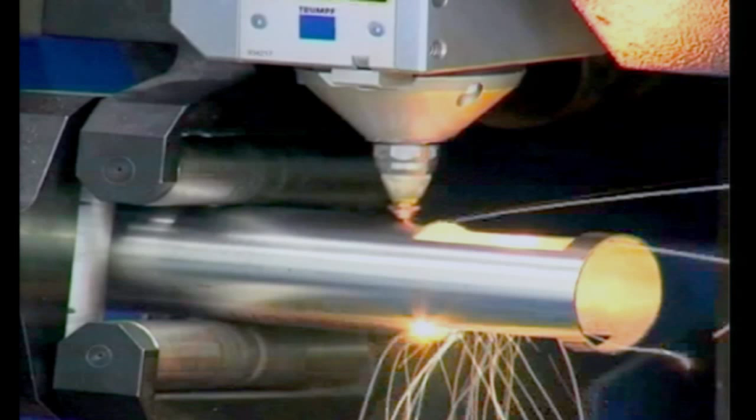Be that facades or built-in systems, in different materialities, that we can produce ourselves directly by working closely with fabricators in their workshops. A lot of our work—we did a lot of factories, we built lots and lots of factories early in the practice, and as we were working for these industrial clients, particularly in southern Germany and Switzerland, we started learning about their capabilities.

One client, Trumpf, produces laser technologies. This is an example of a machine called a Tubematic, which uses laser for cutting tube stock out of metal. So the idea of working—when we were students at Harvard, you'd typically start using software to produce shapes, and then somewhere down the road you would find materials to make a kind of architecture out of it, and tools.

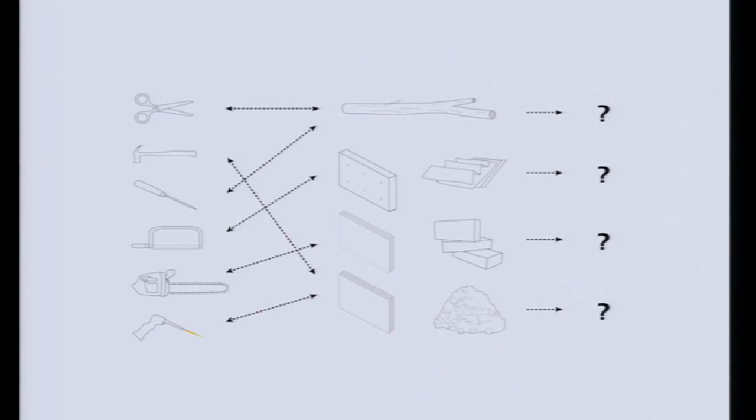We started doing projects where we would start with a material or groups of materials synthetically, find tools, often driven by software, that would produce forms in a certain way. So this kind of matrix of finding tools and materials and seeing how those things could be transformed—this kind of action verb, if you do something to something in a certain way, it would produce a certain kind of formal effect.

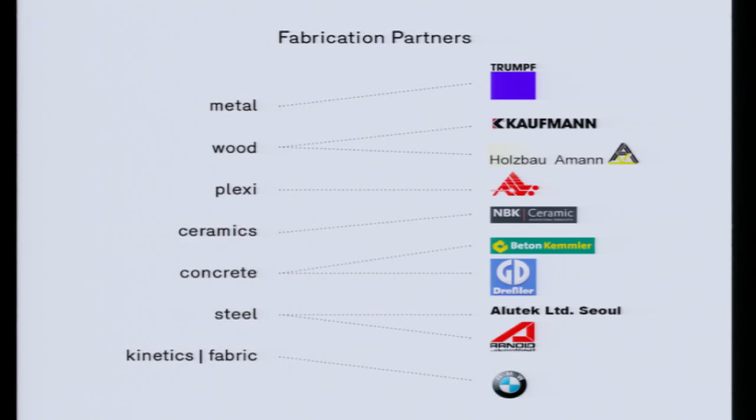In working with materials, we would collect partners from technology, sometimes from the architectural building industry, sometimes not. Sometimes we would do projects with car companies like BMW, so to collect these as kind of partners for producing different kinds of work in the practice.

At the same time, we started to produce our own kinds of archives or manuals or catalogs, and you can do this too—quickly, we produce these kinds of atlases in a couple of weeks. Again, not so much to show any particular project, but really to show different kinds of processes of construction through tooling, through new materials.

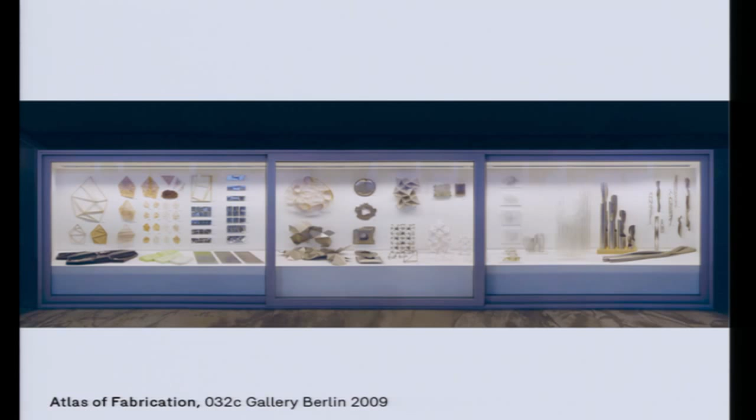An atlas for us is a kind of collection, almost like a natural science history museum, where we would exhibit some of these processes at different scales, sometimes at the scale of 1-to-1, as kinds of collections, almost like a building catalog, but one that we produce ourselves and in a way for ourselves. These are archives that we can go back to—you can select from them, you can keep adding to them. Some things become obsolete, some things become new with other things.

And then also working with students—we really like that the practice is kind of like a studio. So we'll bring students or interns into the practice who also bring in know-how that we don't have, software know-how, or send them off to factories such as this one at Trumpf, where the students went down and tested that particular machine I just showed in a very experimental, open-ended way, simply to see what the capacities are—how fast can they cut, how intricate can they cut, how much would it cost.

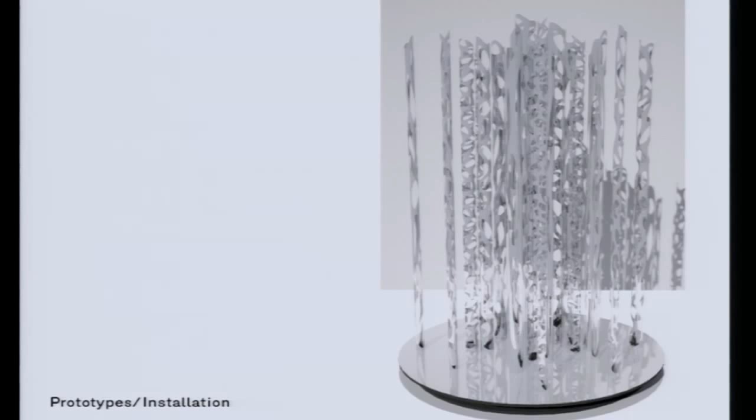It can be transparent, it can be opaque. At the same time, it has a functional, performative idea about being sun control for these spaces. So from the experimental component to a kinetic idea about moving to a full application in a facade system, in a prototypical building that we could produce. That's a very compact process of how that might play out.

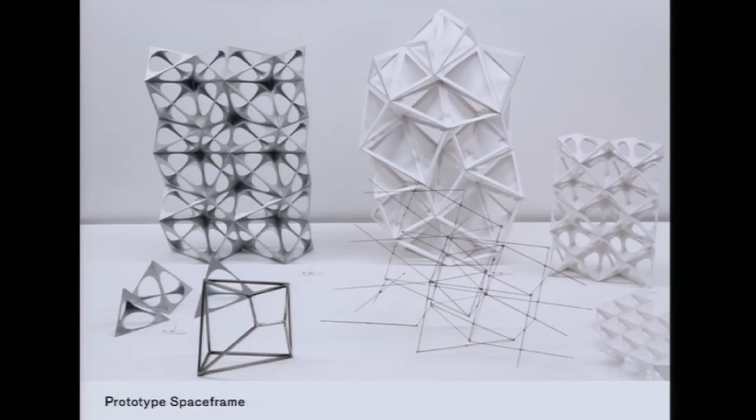Other projects—we also like this idea of working between different scales. In this case, we used the same technology but with a different manufacturer in Munich to produce arrays of chandeliers, where students came in with scripting software. One cut could produce two components that are topologically adjacent to each other, producing an array as a kind of installation-scaled architecture that eventually became a piece built for the Deutsche Bank in Berlin.

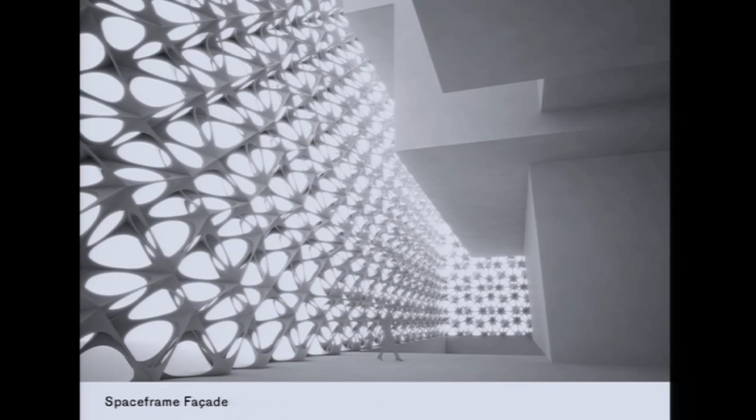Some of the thinking is also something I've talked to Sarah Whiting about a lot—this idea of rethinking a historical project. In this case, the historical project is the space frame, which has been around for 30, 40 years. We looked at it through digital technologies to rethink the space frame, and applied it to a facade for a museum in Zurich, the Kunsthaus, as a double facade with an interstitial space for the public entrance, and climatized boxes on the right which are the museum spaces.

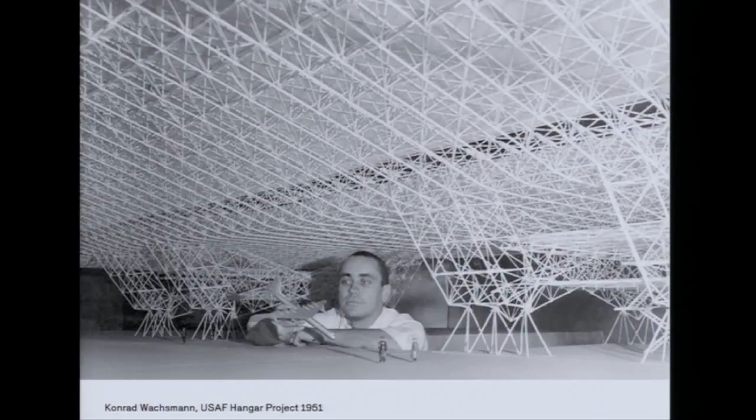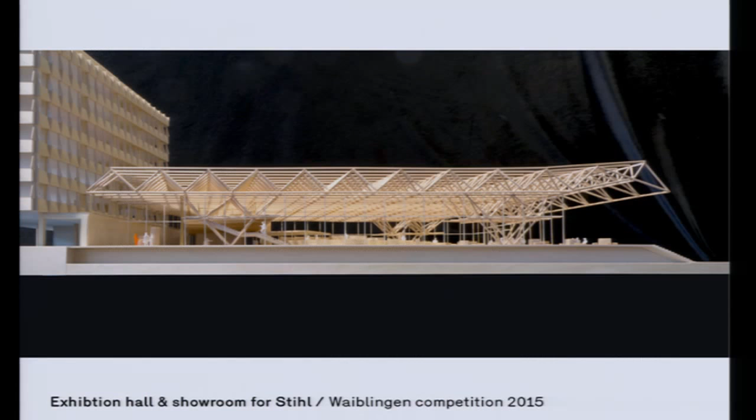Another historical project we wanted to revisit was Konrad Wachsmann's space frames. Wachsmann worked in the States, and also in Berlin and Germany. In wood, he did a lot of wood frame houses, balloon frame—I used to be a carpenter when I started. And then the space frame, but as a steel long-span structure, in this case as an aircraft hangar. So one of the projects we did recently was a showroom for Stihl in southern Germany.

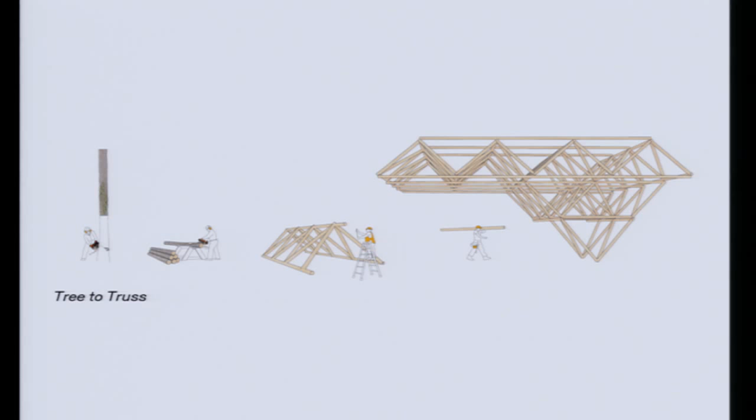Stihl make these super awesome chainsaws. We thought to, in a way, dumb that project down—instead of doing a very complex steel space frame with complex Buckminster Fuller type joints, we did a chainsaw, I guess Texas Chainsaw Massacre style version of this structure. They have their own forest, so they can harvest it, take the logs, cut them with their chainsaws, create these trusses, and form an interior out of very low-tech timber construction with a simple pin joint to construct huge showrooms for their clients to come and look at their machines.

For us, it was an idea of revisiting this historical project, but also using the tools and products that this actual company makes to produce their own building in a very economical, simple, quick way—almost the idea of the material as found. They have their own forest adjacent to their factory that we could simply harvest to produce the elements for the building.

The Thicket project is similar in the sense that it creates a tessellated space frame project. This is very much a work in progress. It's a wire structure—a 2mm wire that's digitally bent by a company that makes coat hangers. They're bundled together with a simple plastic zip tie, but they're incredibly strong, so they can hold the timber.

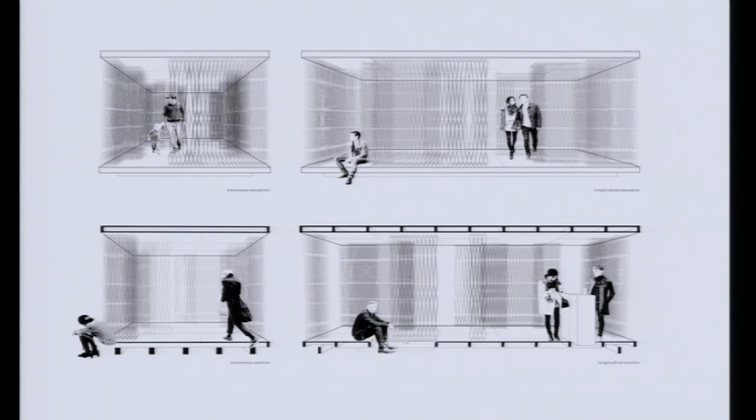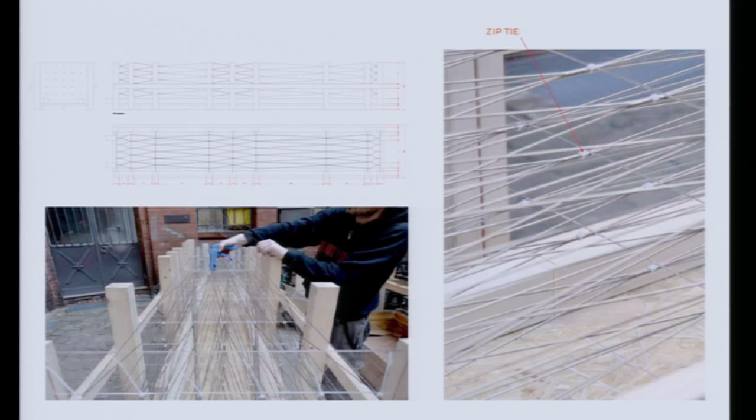There's a timber ceiling and a timber floor, just simple marine plywood that's incredibly strong. We built this thing, and you could hang on the roof and it wouldn't collapse or anything. At the same time, very filigree—that means there's no wind load because it's so thin that the air just blows through it. So we taught ourselves how to make these. We made these frames, and we could produce 3 or 4 of these bundles in a day. This is one of the guys just zip-tying these things together—you can see these little plastic joints, super simple to produce, which could then be arrayed.

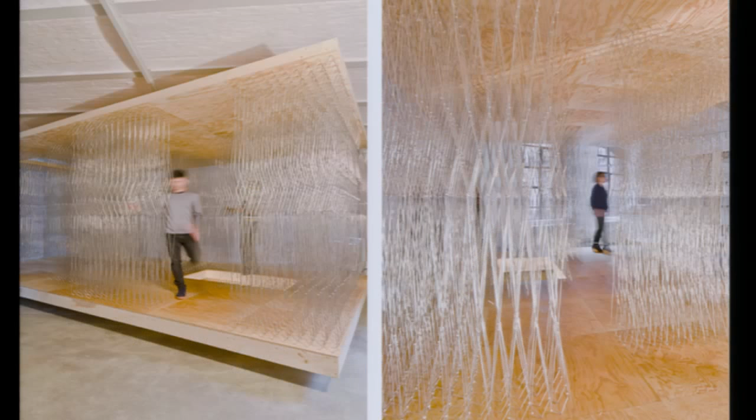So the first step was to prototype this one-to-one. This is the connection—again it has this kind of space frame logic, but these are pinned to the plywood plates, top and bottom, to produce almost a domino-type structure of holding these together that could produce a kind of labyrinth space.

So in a way, the structure, as it gets pulled apart, could do many things. It could be the lighting, you could have mechanical systems in there, you could integrate the facade with it to produce a structure that's also spatially and visually either completely transparent or translucent through this space. So as an idea for a kind of prototype, we built one component at that scale.

But the idea is that these things could expand into bigger and bigger arrays. In this case, this larger one, these are kind of down views with the roof on it, so these would be little people marching around through that.

So like I said, it's a work in progress. If you would like to build this on your campus, I would be happy to show up and find a place for it. So we've been out marketing this project.

But again, this is in a way a kind of client-less project that we initiated on our own in the practice to try to find a site for it. So again, we worked out the economics of it, the speed of producing this thing to produce a kind of pavilion like it. We worked with other guys from industry.

The GINA Studio is a studio run at Harvard a few years ago. Gina was an idea for a kinetic surface. This is a kind of elastic fabric on the skin of the car, which can change, if you can open up the hood or the doors, this kind of folding idea, which I thought was an okay idea for a car, but we were very much in the idea of thinking about this as a kind of architectural solution.

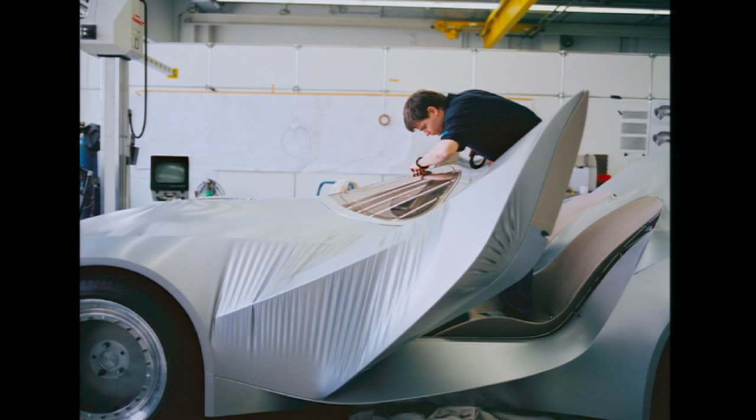So at Harvard, we ran this as a housing studio for kinetic spatial constructions. More recently, we did this as a kind of demonstration. This was at the Venice Biennale last year in Rem's show on the elements of architecture.

This particular room was designated for walls. You had walls, ceilings. If you went to Venice, you would have seen this. But this was a whole history of walls, from very archaic stone walls to period walls in wood to glass partition walls. And in this case, the idea was a kind of kinetic wall that would move.

And we were not so much interested in it as a kind of strange surface, but again, how it could change sectionally that space, that sort of slip space in between it.

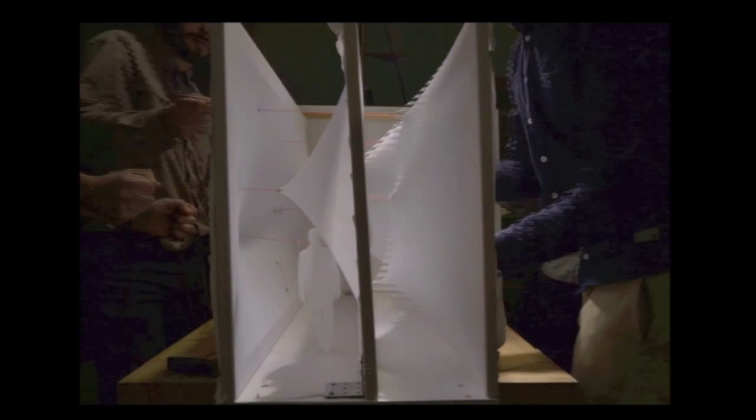So we made this sort of ridiculous film, flew to Rotterdam, showed it to Rem. He said, I got to have one of these things. So that was sort of the deal. So we got the green light to go ahead and produce this thing.

This is the piece produced in Venice. So it's a very narrow space in between it. The wall on the right is a kind of generic glass partition wall. The wall moved like in the model.

This is Sejima sort of petting it. But the whole thing kind of moved in and out, so that the back of it was a very matter-of-fact structure, kind of timber frame, which held these actuators which could move in and out.

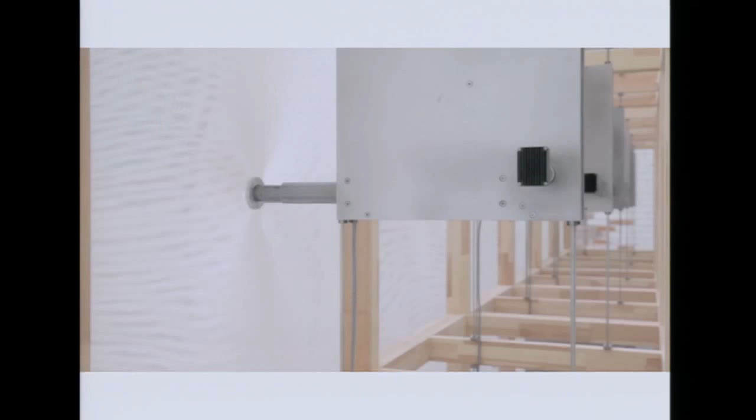So it was a kind of tongue-in-cheek a little bit, but the idea was to produce this in a double layer of Lycra. The skin is translucent. Again, really not to simply produce it as a wall, but somehow to impact that slip space, that space in between the historical walls and this as a kind of maybe more forward-looking wall. So again, looking for a kind of application for that.

So around this time, we're really using these kinds of invitations, these biennales, for these kinds of prototypes or installations. So again, for us, it's not an installation in the sense like you would think of as an art installation. For us, we're always in some kind of mode of prototyping these things so that they could somehow rescale or find themselves in a different kind of context and program.

So with the Loom Hyperbolic, we got this terrific site next to the Kutubiyya Mosque, and Morocco has no public Museum of Modern Art. So one of the ideas of the curators was to make this stuff, put it in the public domain as a kind of place of encounter.

So we went back to Berlin after we got the site, and we started producing these structures, which are quite simple. They're ruled geometry, which is ruled geometry, straight lines. So offset straight lines will produce hyperbolic surfaces with a very simple kind of timber scaffolding to produce this. So we drew these things digitally.

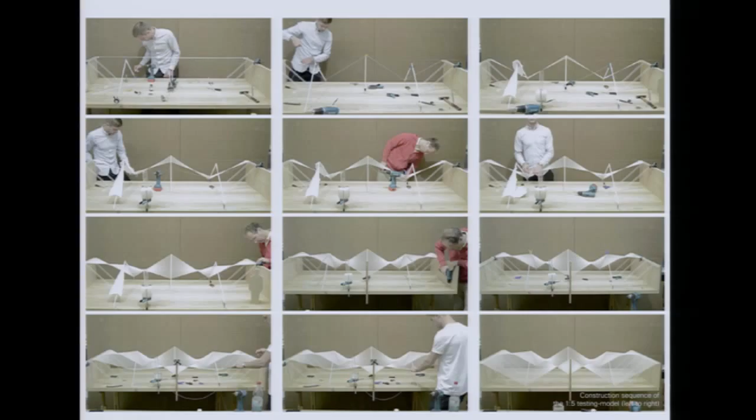We produced the model digitally in terms of making templates to produce it, but then built it on site very much hands-on. We used donkeys to bring all the materials on site. We worked with local craftspeople there to produce this thing, using very simple timber.

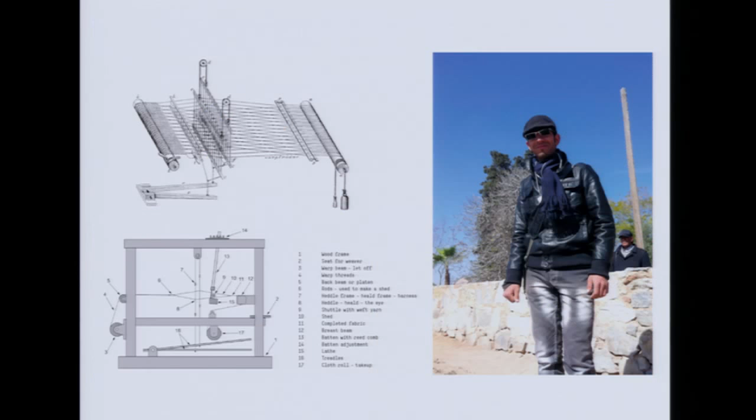In the souks we found fabricators who would weld these steel connections to put the whole thing together. So it was a combination of the kind of digital technology we had in the studio, and Mohammed, one of the foremen who produced the project, who was an expert at tying knots in this kind of woven structure. It was a combination of local craft with a kind of digital ambition for the project that made it possible.

So it had a scale, on a 5 meter by 5 meter grid. You could move around the project, move within it as a kind of hyperbolic structure. It worked as a kind of sunscreen. But again, the idea was to set this project up for a kind of future project in the practice. Projects like this, industrial projects, have to do with repetition, redundancy, and structure. So in a way it was a very suggestive project for us.

So in a way, where that project landed is a more recent project for this fellows' pavilion. There's an American Academy in Berlin, a kind of think tank where scholars come and work. It's on the Wannsee, so the actual villa is back here. It's really packed, they don't have much space to study. There are lectures, and they use it as a kind of outreach place for Berlin, for Germany. So there was a site where we could create a kind of pavilion for the scholars and visitors to work as a study place. It sits in this beautiful garden which goes down to the lake, to the Wannsee, as a kind of freestanding pavilion in the garden.

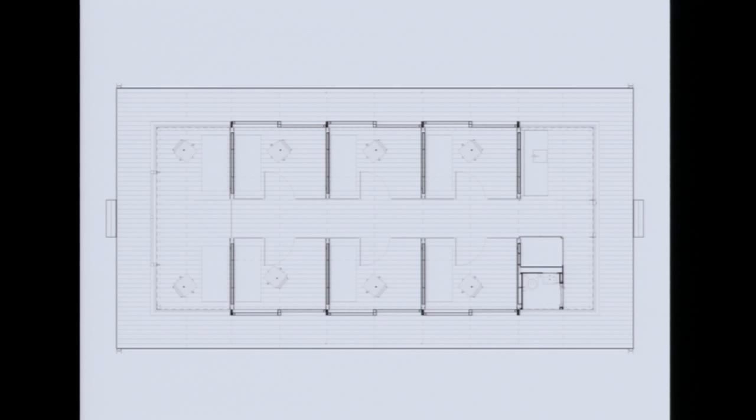The idea was to take the hyperbolic roof as a very specific, sectionally developed idea for the project, in what otherwise is a very straightforward series of study carrels, about 7 square meters, with a common space, a bathroom space, and a kitchen on a steel and timber platform. This is up against a historical wall, with a garden here, and an open, larger garden on the other side. We produced the whole structure out of prefabricated steel, combined with oak floors and walls.

The heating is in the floor and in the ceiling, and that Marrakesh structure was translated into this extremely light steel structure that sits on four corner columns, which also serve as the drainage. Each carrel can close behind curtains or open up with sliding doors, so they could use the outside, like a kind of Midwestern porch. So even though this is in Berlin, somehow for me it's a very American type of project, as a kind of freestanding, independent pavilion.

At night it's uplit, so you can read this hyperbolic surface very clearly, and we welded a very simple membrane roof over the whole structure. You could have these study spaces and then just open the doors for a really nice connection to the garden. Beatriz Colomina, one of our old teachers and one of the first fellows, is shown advertising our building here, reading some books, sitting on the porch. That was a great launch for us for the project.

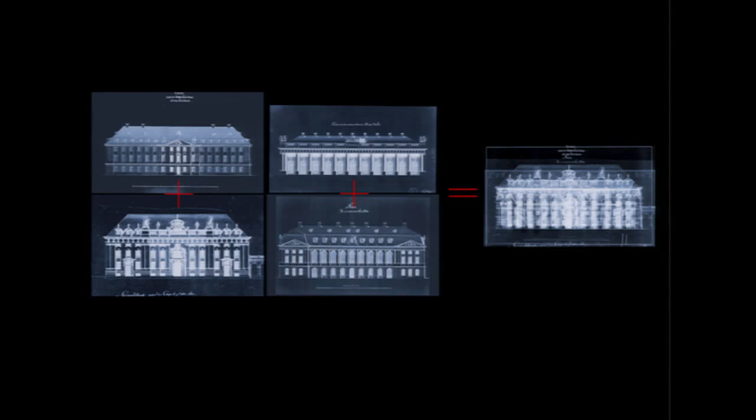So the idea was to look at all the buildings that were proposed for the site historically and then morph them into one form. We wanted the building to have this kind of historical connection to the sandstone buildings around it, which are mostly Baroque. So it had the formal relationship to it and the same material, to do it in stone as a sandstone stacked thing, but to have a certain level of abstraction.

So we looked at those kinds of surfaces and started constructing these as stone plates that you could stack almost like a kind of lattice type structure.

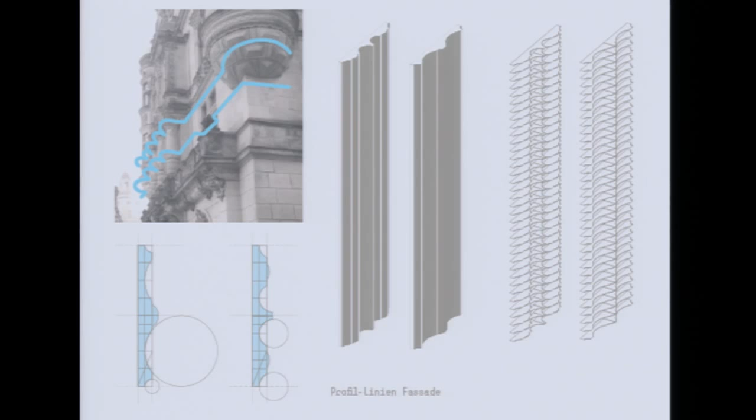So in a way, the building would be very familiar as this historical thing, but the closer you looked at it, it would be something else. It could be either completely opaque or very transparent, almost as if you sort of cut the building apart into a million pieces horizontally.

This is one of the projects where we really started thinking about the facade as really the architectural project of it, the whole thing, again in terms of performance, but also in this case really the image of the building being something historically sympathetic, but at the same time being something completely new or fresh.

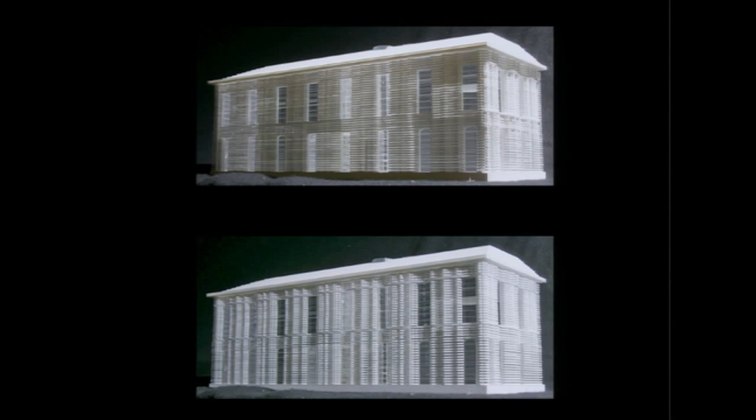So after we worked for many years doing industry, doing factories out in the middle of nowhere, out in the periphery, more recently we've been doing a lot of work in Berlin. One of the first kind of urban projects we did was this tower, Tour Total, which is the first building block in a larger master plan here, called Europacity.

So this is the main train station over here. This is the whole government center over here. Hitler's famous dome, this gigantic dome, would have been built here on the north-south axis. And this is the Hamburger Bahnhof, which is an art museum over there. This is sort of an art center here.

So we had the chance to do two buildings here to kind of reintroduce that. There was a lot of public attention on this building, what this thing would be, how it would fit into this ensemble, after all these kinds of building cycles in Berlin, the Friedrichstraße, the Potsdamer Platz, all these kinds of things that when we first arrived in Berlin were being debated and competed for.

So we wanted to do a building, for Total, the French energy company, that was somehow historically familiar as a frame facade. Around here you call it a Chicago frame, which is a load-bearing facade. That's the structure. It's not simply a glass skin like you would see in the new World Trade Center tower.

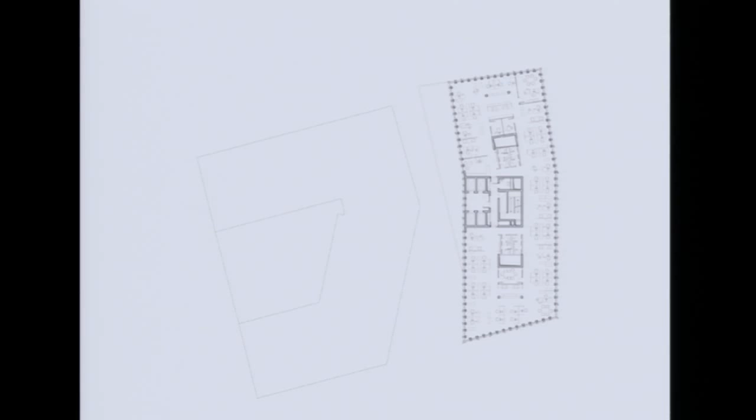We could create a pedestrian passage between this building, which we just finished, with a metal curtain wall, and then the load-bearing wall on the right. So in a sense, it's a kind of exoskeleton where that's the structure of the building. It has a core, a virtually column-free interior, flexible kind of generic office space.

And then we came up with a facade that's made out of precast concrete, which are shaped either as T's, which interlock like this, and then have a kind of K shape.

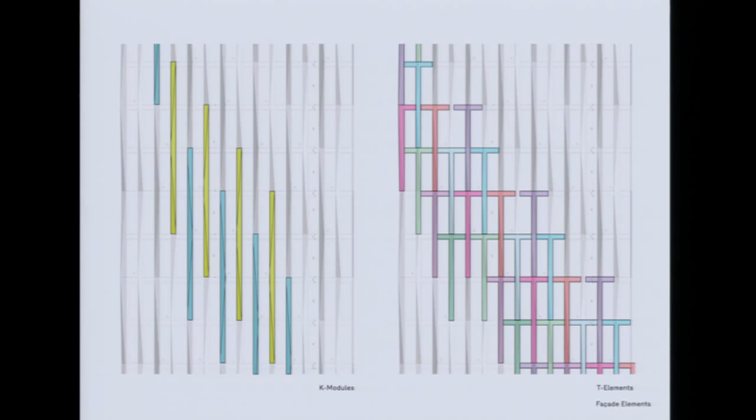So as I was walking around the campus here today, I saw lots and lots of buildings from the 60s and 70s that are made out of precast concrete. So you could do this too. The technology is here also, but this particular building is built outside of Frankfurt.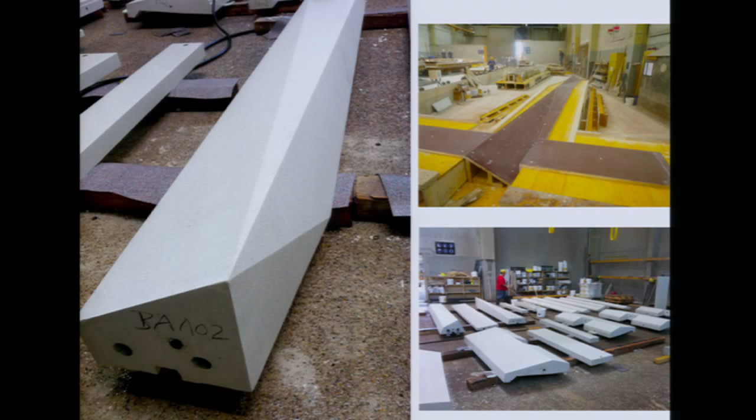We use our digital know-how to make pretty complicated forms out of plywood, so that even with precast, and if you look at the precast around here, there are always like 2 or 3 components that get repeated. With the kind of digital abilities now, we've created like 160 pieces that are completely different. Some pieces are repetitive, but you could make pieces that are unique without completely destroying the budget of the building.

They're incredibly precise, with a kind of acid etch. They're structural. We hadn't had a lot of experience with this kind of material, but we were really excited about using it for something like a facade. Again, it has a kind of depth, so it conditions how light comes through the building. There are exterior sunscreens, and the windows can open so you can get fresh air.

In a way, these were kind of like buildings were made before, like the Flatiron building had a facade like this a little bit with awnings. So it's somehow both a historical way of doing things, but at the same time with modern techniques, and formally a really dynamic facade that moves on the diagonal visually through this kind of offset origami cast piece, which is very, very precise.

And then, as a core and shell building, we could also control things like the ceramic tiles in the lobbies, and do the stairs and things like this.

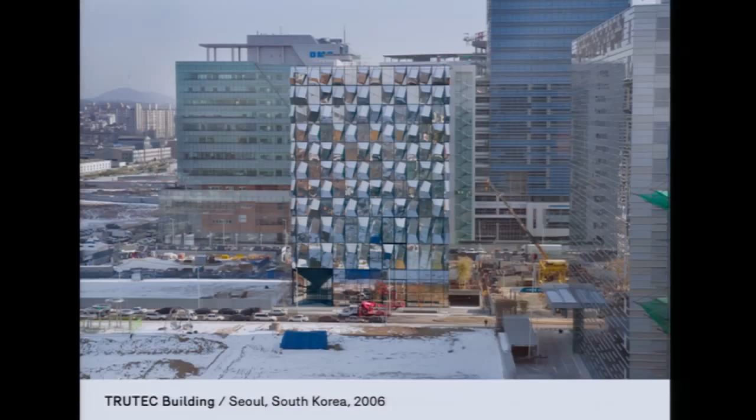This is when we also started to shift typology, starting to work with mid-rise to high-rise buildings. A little bit earlier, we were doing this TRUTEC building in Korea, which was the first project we really did outside of Europe or North America. We had no idea how to build in Asia.

We went there, talked to fabricators. There were advantages in terms of costs and fabricating that would have been unaffordable, or not allowed through legislation, to do in Berlin or Germany. So we produced a facade that works like a kaleidoscope.

This was a whole new sort of office park, tech park, that for us had no context. It was literally a city being built from left to right. So we had a site in a kind of very loose master plan, and the idea was, instead of trying to be contextual, to be, in a way, acontextual.

When we were students, I always loved the building like Pei and Cobb's Hancock Tower, which at the time used reflective glass in the '70s as a way of assimilating historical buildings like the Richardson Church nearby. But we liked the idea that you can never make it perfectly flat, so there was something about the disturbance of that glass that you could exploit by simply faceting it in a very, very shallow depth, which produced an amazing amount of visual effect.

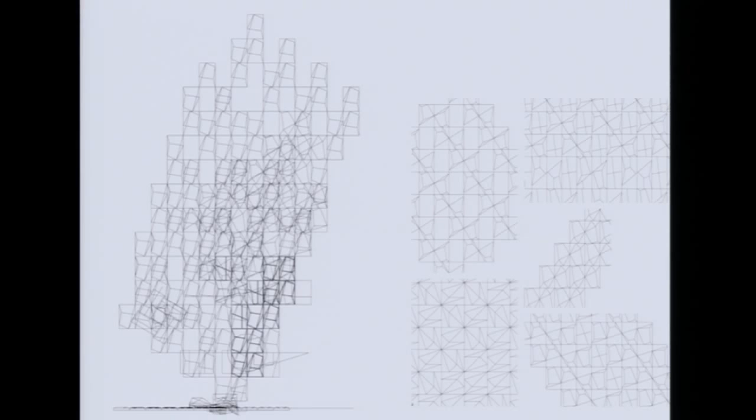So we started doing these little drawings, these sketches, understanding the limits of glass size to make the facade really three-dimensional. There are three-dimensional elements - you can tip them upside down to make a different type, or combine them with flat pieces, which are more economical. We created a kind of entrance as an indentation.

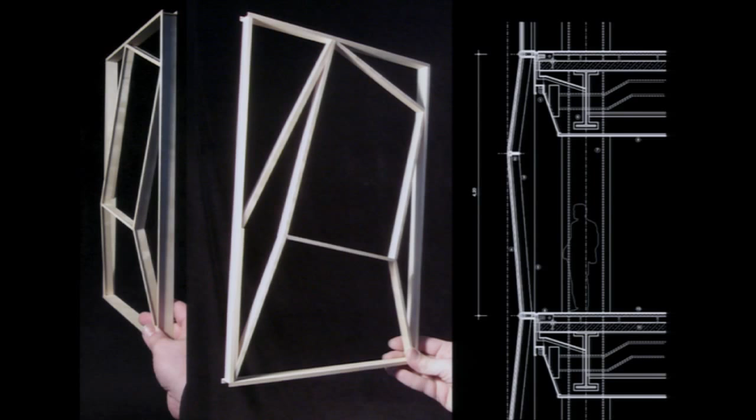We drew it digitally, then started making plywood frames to understand the geometry, then went back to Korea, hooked up the Korean team with Arup from Hong Kong, who did workshops to produce these window frames. In mid 2005, 2006, there really was no precedent - no catalog precedent for such a facade.

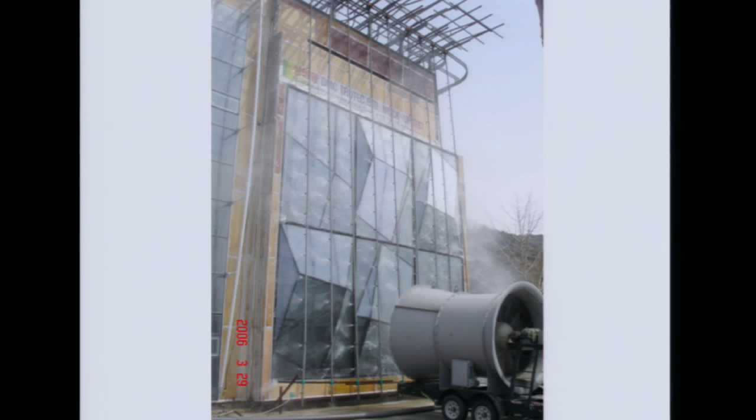So in a way, what was exciting for us is that you could really make this up. You could find somebody to produce this, find ways with CNC to cut it, build a mock-up, test it, blast it with typhoon-strength rain and wind to see if it would work, and then go into production. This is about the time we really found out you could start to produce your own kind of architectural solutions for one-off buildings that we were doing now all over the world.

These guys would really jump in and do it, producing a lot of the stuff off-site, bringing it on-site, and putting the pieces up in an incredibly quick amount of time, to produce a kind of building that created a really astonishing visual effect - from complete kaleidoscopic reflectivity, to reflecting the LED advertising across the street, to becoming almost completely transparent at night.

So it was really about that kind of visual performance of the facade versus the more crafted things inside, like the suspended stair, or doing the lobby wall in a wood version of the exterior facade.

This facade-making was one project in the office. The others were a number of projects. Another sort of chapter was this idea of ultra-structural, where we started working with engineers up front - Swiss and German engineers - to produce much more ambitious structural engineering projects, where the engineering wasn't simply to prop up the architecture, but in a way the engineering was the architecture, and vice versa.

So in a way, it's a factory, but it's also like a campus. A cantina, historically in Germany, would be a kind of terrible cafeteria in the basement where you meet once a day, but we wanted to turn it into a kind of event pavilion where it would be a cafeteria, but you could also use it for music, for lectures, for parties. We created it as a kind of roof, almost like a leaf structure, that would cover an excavation, which is partially underground because the whole factory is connected by tunnels at 4 meters under grade.

With the student interns, we did a series of studies where each study would consider a material. So the honeycomb one was going to be timber. The spiral is steel. This slab one was made out of precast concrete. So there was always a material idea about how this would work.

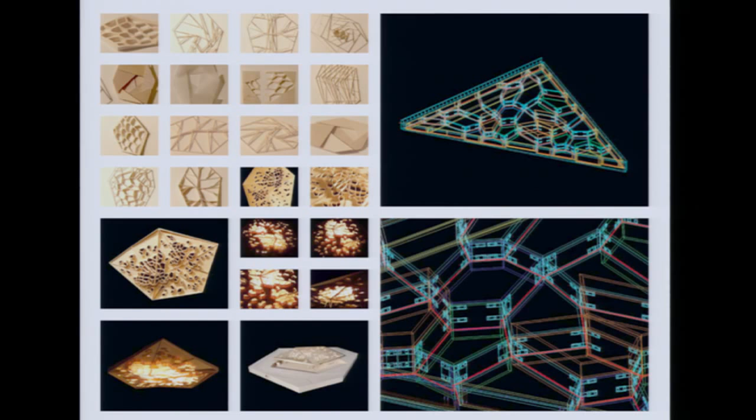The idea is a kind of perforated surface which would cover the open space - in a way the roof is the most important thing, as a kind of ceiling, letting natural daylight move through. So in the model you see the excavation, which kind of sets up the project.

We didn't want to produce this thing as an object, but more as something that you would discover. You could go through this tunnel and then pop out and find this space. So the emphasis is really on the space that this roof, which hovers over that cutout, produces.

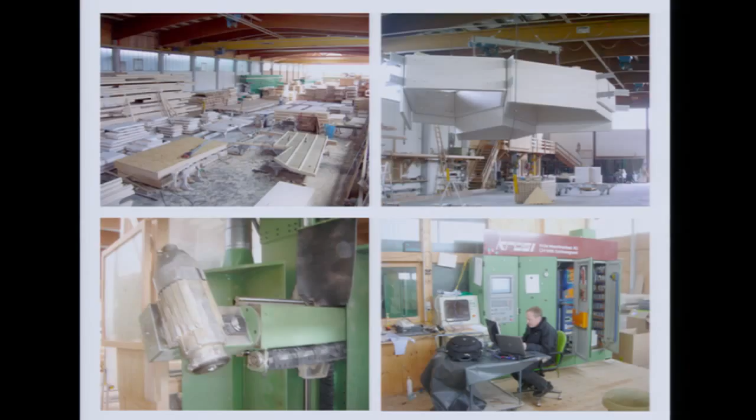We found a manufacturer in the Black Forest, Holzbau Amann, who started cutting the pieces. When we went into production, we made again a kind of mock-up of this - it was almost like a honeycomb structure made out of glue-laminated timber with very simple steel joints that you just carriage bolt through. Each piece could be unique because we can do everything with digital cutting now.

So we went into these gigantic production runs in their warehouses. They were running this project next door - they were doing Shigeru Ban's Pompidou project at the same time. These guys would redraw all of our drawings to go into this kind of production, so we could do this all pretty quick.

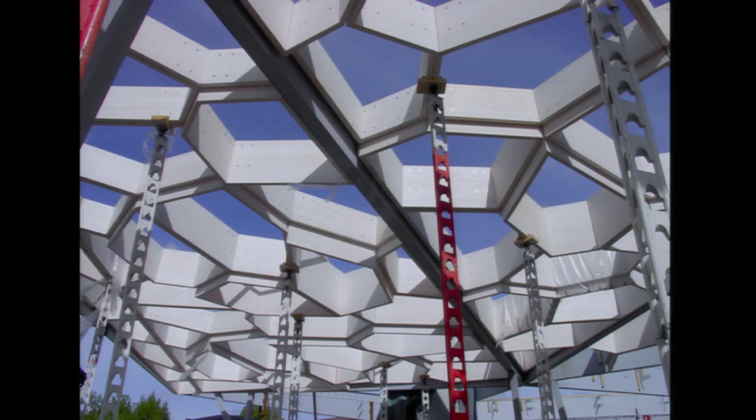So we'd pre-cut these things, bring them on site, put them up with these little temporary helper columns, and then combine it in the end with steel. We combined it with steel so we have very few columns, these kind of column groups here - you can essentially have almost a column-free space, which is in a way kind of generic, flexible space.

You can change it by sinking the building into the ground. We developed this mezzanine space, which right away they could use, almost at the level of the ground above, and then could program the cells. So the cells could be a skylight, or an acoustical panel, or artificial lighting at night.

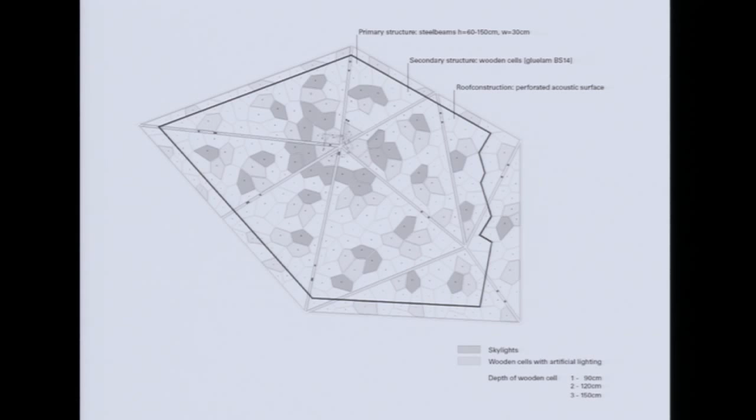Working with Transsolar, our energy engineers, we could make the roof smart by targeting each cell to do something slightly different than the other one. So the roof is very specific, very tectonic, and then the spaces are very flexible - you can put tables and chairs here, or open it up for a party.

And then again, we produced this mezzanine, which is almost at grade - these are the kinds of grass berms that define the space. By this point, we really got to designing and fabricating everything in the building: the furniture we designed and built, the terracotta tiles we designed, and the precast concrete pieces we made here.

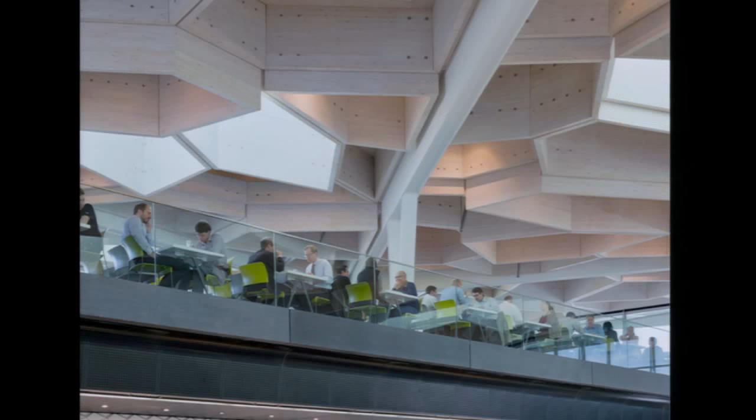There was nothing off the shelf except for maybe the door handles for the project. Everything could be imagined and then fabricated and put on site to produce, for us, a building as a kind of unique one-off project within the whole portfolio.

The building at the exterior is de-emphasized here. It produces an exterior porch on the south, integrated into the landscape where, socially, the building becomes the center of the whole campus where people can meet—white-collar guys, blue-collar guys, clients and managers—as a place to meet, talk, and exchange ideas.

At the same time, we did the Gatehouse project with Werner, who at the time was really keen on doing the most insane cantilever building ever. So in this case we really used their technology, the laser cutting for sheet metal. We went back and looked at historical projects like Jean Prouvé, what he was doing in the 50s with bent metal, and produced gatehouses for the entrance to this campus.

We knew they were producing things like this. It's laser cut and laser welded, so you could do anything with this kind of technology—make a really strong tabletop, or decking for a really big ship. But the scaling for us was something at the scale of the roof.

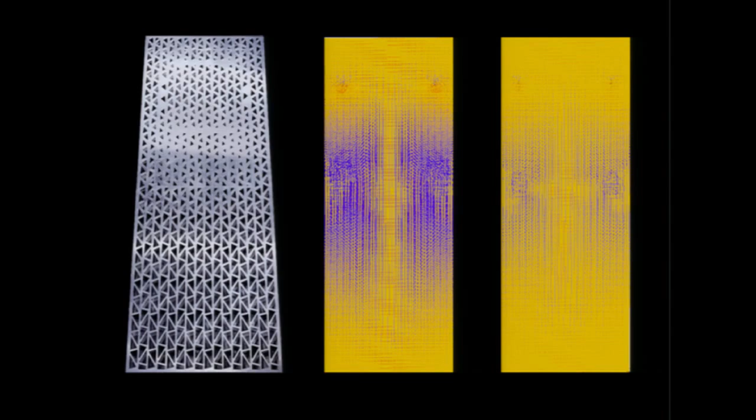We inherited these engineered drawings from Werner, with the loading diagram—compression here, tension columns back here—and started to interpret those drawings into this variated, triangulated structural roof truss for the project, which was quite cool.

We could build these as strips. These are the columns, protected with plywood. Expansion joints here. We did a prototype where these are variable—the bottom chords, the cutouts are variable. We integrated the roof drain and all the technical stuff.

Then it became this kind of performance where we lifted this huge roof up, dropped it onto the columns, took the crane away, and the thing bounced a couple feet. It's like a giant diving board with a gigantic concrete counterweight in the ground to keep this thing stable—it snows 1 or 2 meters here.

The whole thing could flex without crushing the facade, which is glass and entirely made of glass. We had a gasket so the roof could deflect without crushing it. So the facade was also a project within the larger project.

It's a double facade filled with plexiglass tubes, which again goes back to a kind of hand craftsmanship—this guy is gluing these things all together, and then they fit in between the two layers of glass to produce this. So that's the sunscreening.

There are additional screens that come out of the floor. The posts are made of laminated acrylic. So the entire facade is either transparent or translucent, and the effect visually is almost like a lantern to mark the entrance to this campus.

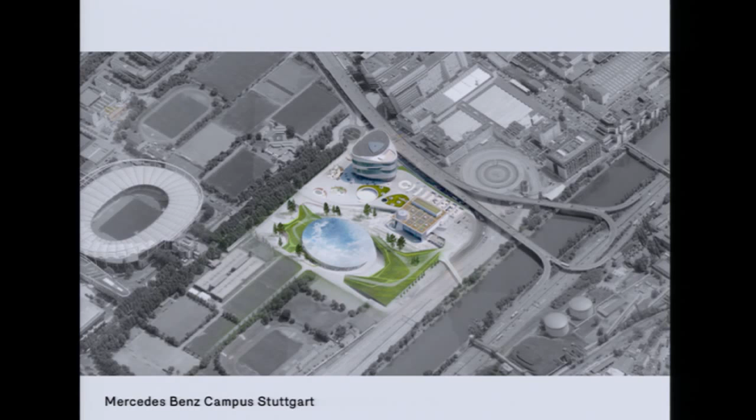In reality, this would be a 9 meter by 9 meter grid, translated from wood to steel. The steel coils would be hollow, and you would fill them with water, so the water would be the heating and cooling for the whole building in a 9 meter by 9 meter steel grid. For us, that was everything—you could have something that would condition the light into the space, and it would be the mechanical systems.

It would be the structural systems, an idea for car guys, about movement and a kind of dynamic that was familiar to them.

So some of the things we did while doing the architectural competition was treat it again as a kind of installation scale, tested in a small architectural gallery around the corner from the office. And then we looked at the scale of the museum, which is 140 meters, pretty big, like 100 meters is like a football field.

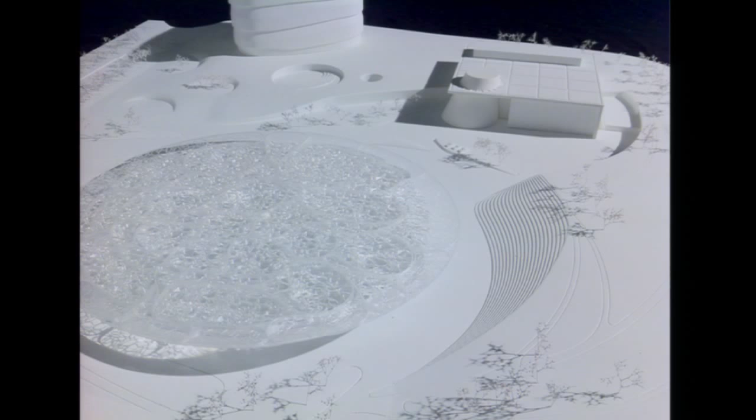So in this kind of loop structure, on the sides would be the shops, the kind of workshops for the cars they could work on, and parking on the other side. You would have, again, this kind of coil loop, which is the structure.

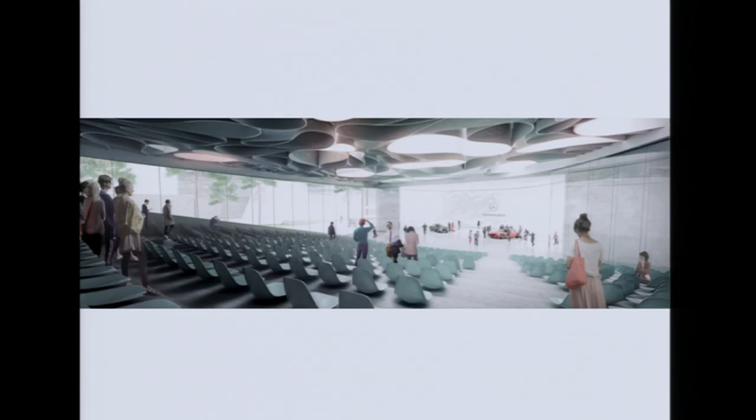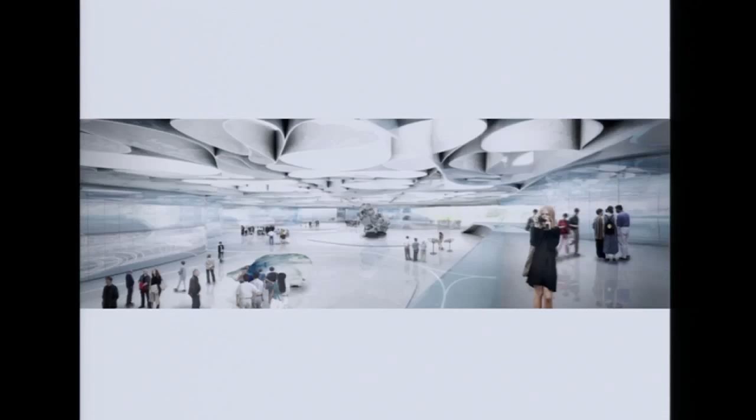At the same time, you could have partition walls that would divide different areas of the museum to produce this kind of place for experimentation for Daimler and Mercedes-Benz. So this could be a theater space, within that coil roof here. Or it could be a kind of exhibition space for whatever Mercedes-Benz thinks about the future of mobility, in this kind of mezzanine space and a space through here.

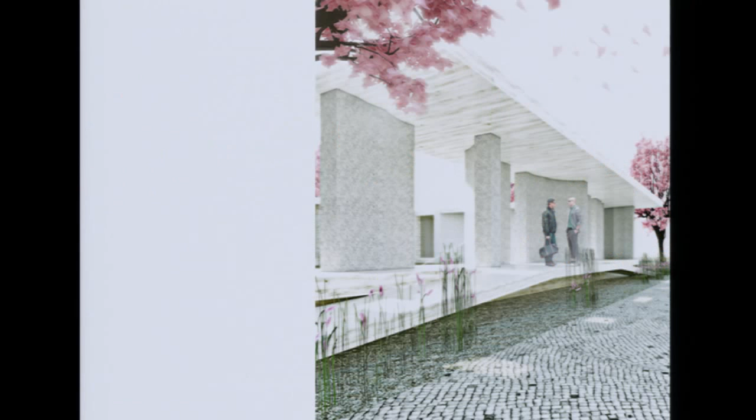So it should be about smart materials that are thinking about sustainability and these things. And so we started to ask ourselves what would be smart. This is residential, producing about 12 apartments in this prefab. It was something that could change. We also looked at a version of this where it was a one-story pavilion. But the idea was really to force ourselves to start with the materials.

So we started with infralight concrete, which is self-insulated concrete. The aggregate is not stone, but either recycled glass or clay, so it's super light—if you put this in a bathtub, it'll float. And then we combined it with wood, like timber decking. For us, it was thinking backwards, sort of unorthodox to combine timber with precast. But these became our materials.

What was interesting about using infralight concrete is the thicker you make it, the better it is in terms of insulation. And modernism was always about thinness, right—like steel and glass made as thin as possible. So we looked at historical things like this idea of a kind of material poché, or thickness.

And then came up with this component. The idea of the component was that it would be multitasking. It has a certain formal shape, which means it's self-supporting—you can drop this thing on a floor and it won't fall over.

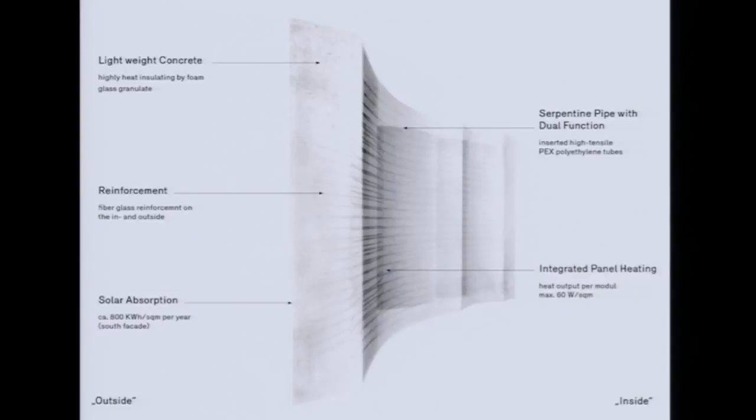You don't need scaffolding. We had these coils in it, so it could be the heating, it could be the cooling, it could be solar absorption. We were working with sustainable architecture engineers, and we always hated the idea that the sustainable stuff is simply tacked onto your architecture. We wanted the idea to be totally integrated, that the sustainable idea was the architectural idea at the same time.

So we made these components, which again are for housing, so they would have a kind of residential, domestic scale to them. We could combine these things—they just start and stop, so you could combine them with simple wood, like timber windows, and do a limited amount of parts. Because the wood floors are self-insulated and the concrete elements are self-insulated, you don't have any kind of cold bridge problem.

So each floor plate could be unique, slightly different. We made a 9-square grid, so you could have a kind of open loft-like work-live space, or if you like little rooms, you could have partition walls and make rooms.

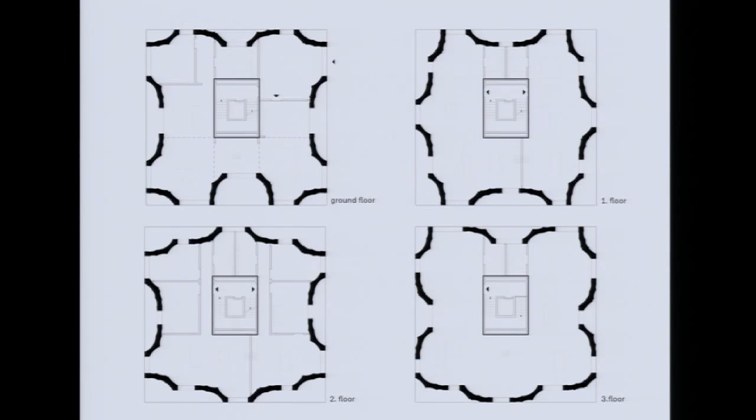Structurally it was interesting because the whole thing works like a house of cards—you can simply stack these pieces over each other. They don't have to line up; they can overlap to produce that kind of project. And again, because of this kind of material thickness, we photographed the models and it produced a very different quality of light.

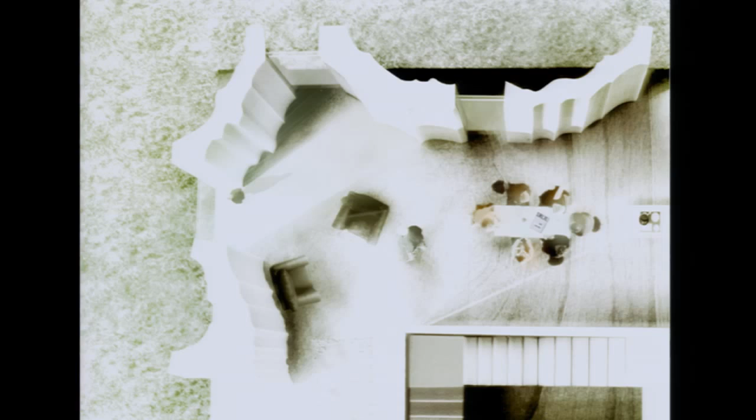There was a kind of softness about the light moving into these spaces, which was quite different from the projects we did with steel or glass that had a kind of thinness. So you had this very articulate, undulating outside versus the very straightforward gridded or partitioned spaces in between.

To understand how this system worked, we built huge, large 1:20 scale models. They were super stable, and had this kind of reversibility about it too. The interiors would make one kind of space, while at the same time residually you'd get a balcony space, so each unit could have these little balconies around the corners of the building.

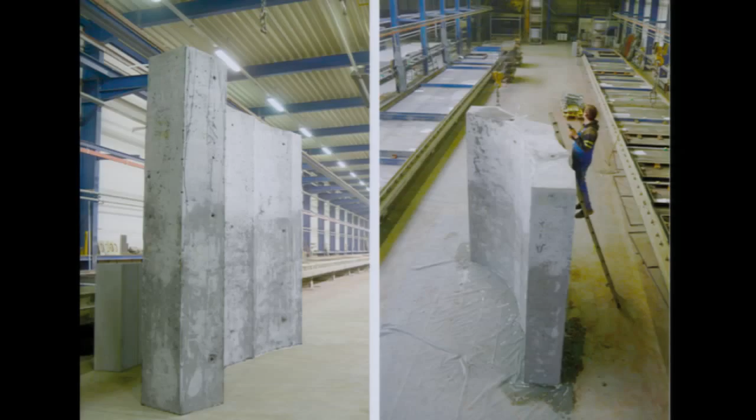To figure out how to build these things, we won a prize from Holcim, the Swiss concrete makers, who were very keen on seeing this fly. So we took the money and got the actual materials we would use, prototyped a wall, tested it, loaded it, tried different surface finishes on it, saw how it worked, and kept going with the project.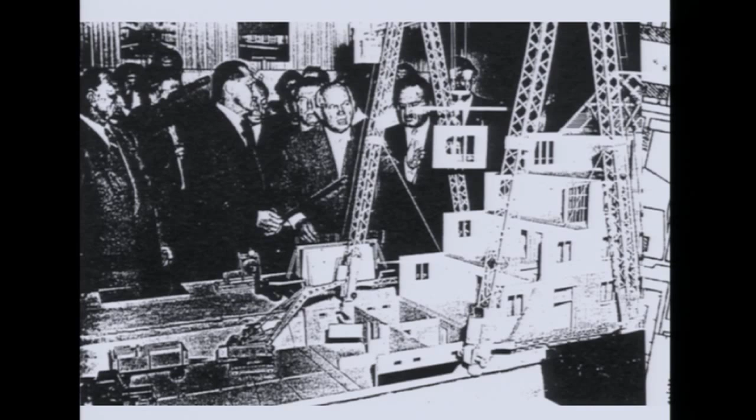The latest version of this project is so-called urban living. This is in Berlin, for high-rise structures for low-income housing, in the context of the Karl Marx Allee, the former East Berlin. This is where the district of Plattenbau is, prefabricated concrete buildings from Khrushchev in the 50s, supervising this model where you could build Eastern European housing very quickly.

So the idea was, in a way, to rethink that project for a point tower. In Berlin, there's been a need to produce housing, at least 6,000 units a year. How do you add density in Berlin, within the constraints or the opportunities based on setbacks, legislation, how you can do that?

In the last few months, as you've all been reading, there's been a huge influx of refugees into Germany. This year alone, 800,000. Next year could be 500,000, and the year after that could be 500,000 more. So there's even more urgency in terms of producing temporary housing right now, but also how to produce more permanent housing in a quick and economical way. This project keeps getting more and more urgent in a way.

So we did a survey where we located sites within this whole region where we could drop in that kind of high-rise prototype, without negatively impacting existing housing around it. In a way, strategies for density.

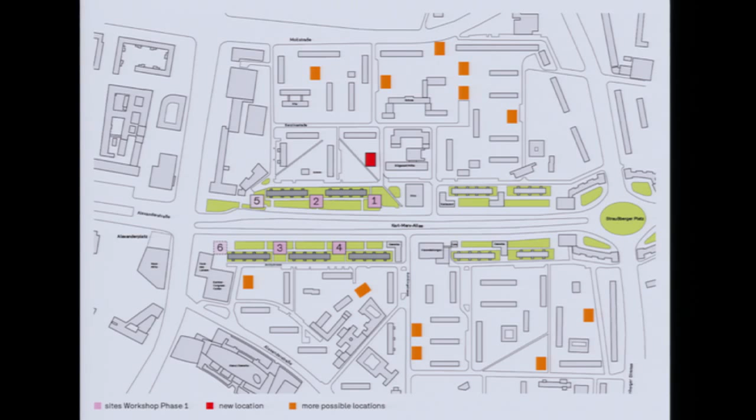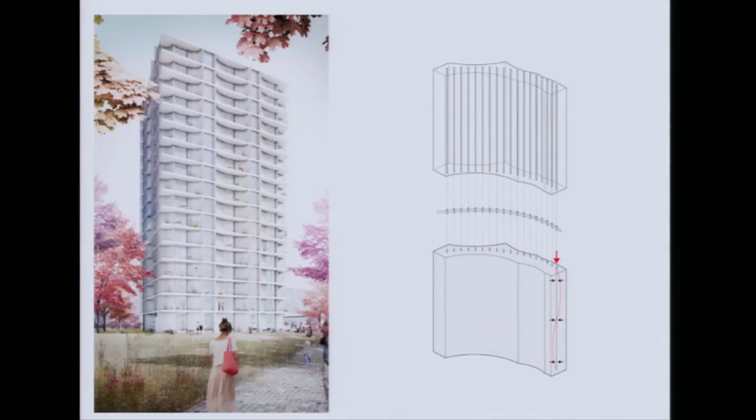This is also the studio we ran in the spring with our Harvard students on housing. This is a project, work in progress, but only recently it's become even more important to find solutions in a city of 3 million, like Berlin, that could accommodate both the local population as well as this huge influx of refugees coming into Germany.

Again, it would be similar to the Hamburg project in terms of producing very simple, column-free, loft-like spaces that have exterior space and interior space that can be either left open or partitioned into smaller rooms.

The other category, this idea of makeover, is one where we're not always doing new construction. In a place like Europe, you're often dealing with existing housing stock or existing buildings that need to be transformed, either because of programmatic transformation or material or performance transformation.

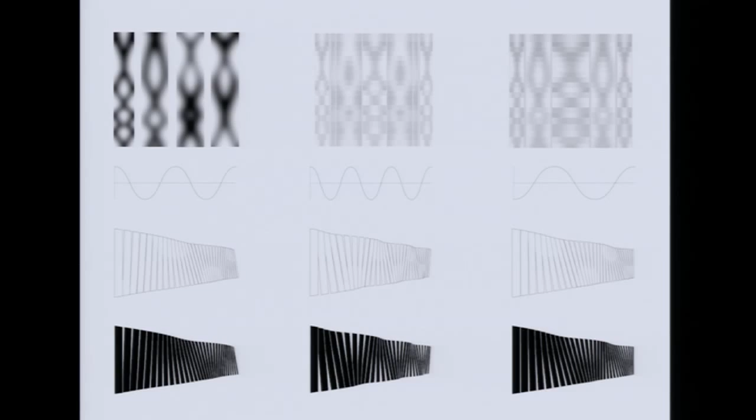One case was the Charité Hospital, the major hospital in East Berlin before the wall came down. That's also a kind of precast concrete facade that's literally falling apart, that leaks, that's terrible in terms of energy use. So the idea here was to produce a facade that had a certain formal effect, to dematerialize this really out-of-scale, heavy building within this beautiful historical context.

So the solution was this skin, a double facade with an outside so-called Prallscheibe, which is just a single layer of glass that protects the hospital rooms acoustically. But at the same time, by simply moving those surfaces slightly, it produces this kind of formal effect, a very dynamic, undulating surface.

At the same time, we find ourselves repurposing our own projects. This is a so-called biosphere project, which we did back in 2002.

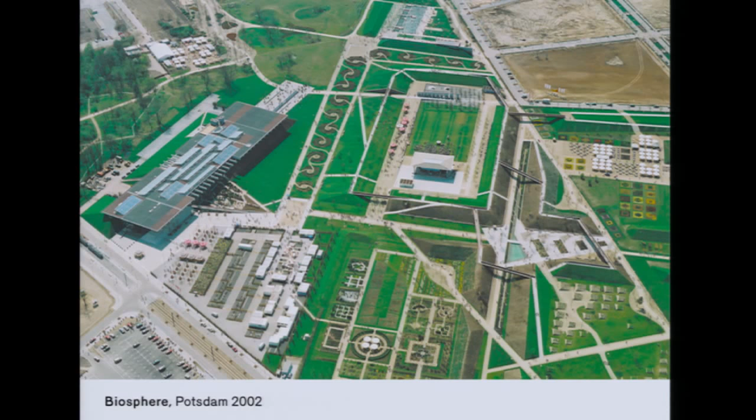This was a militarized site used by the Soviets. It was transformed into a public park. We produced a building that was like the project, like the park, created by a series of berms with a very simple flat roof, like a giant infrastructure project.

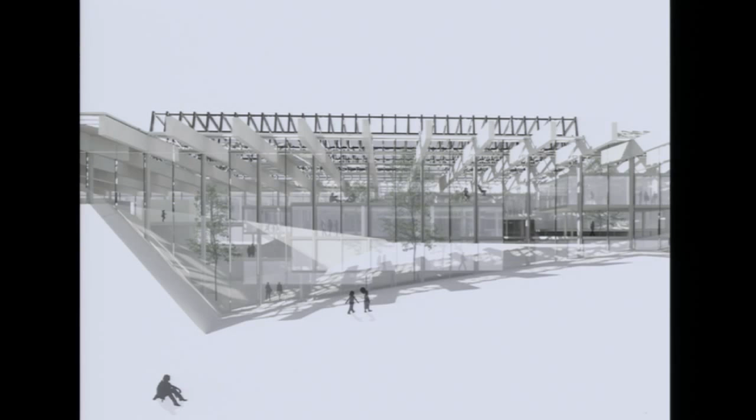We cut into the ground to produce a kind of greenhouse on the inside. So it ran as a garden pavilion for the garden show, and then as an attraction for 10, 15 years. In the third iteration of this project, we're looking at putting a school within it, so these would be classrooms we could insert into the space, which looks like this right now.

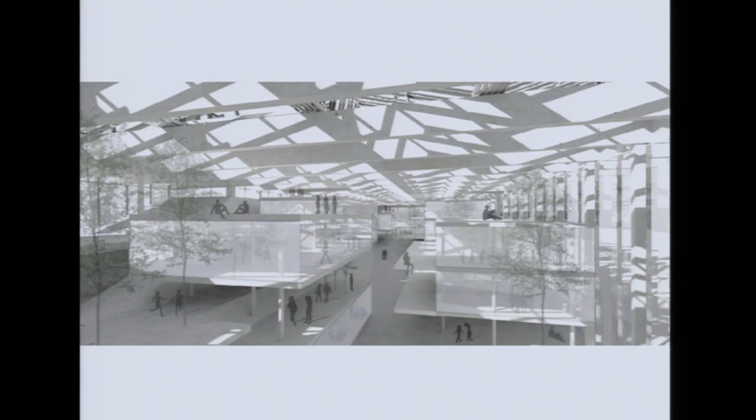The building right now is earmarked for temporary housing for the refugees that are coming in, but somehow this has become part of the reality of the practice, actually having been doing this long enough that you go back and revisit your older projects and find ways to repurpose them. So the programmatic life of this project was maybe 12 years, and then it will go into another very temporary programmatic use now, and then a kind of longer one.

So in a way, this is kind of the dirty realism of the practice, or some of the projects we've been doing, and having the chance to go back and revisit these kinds of projects and rethink them.

In the last category, site-specific, is maybe going back to, for us, more of a European kind of project, making projects that are tailored or unique to a particular site, where the conditions of the site are what produced the project. That would be the opposite of, say, the Korean project, which is really about dropping into a site that hasn't really been formulated or is emerging.

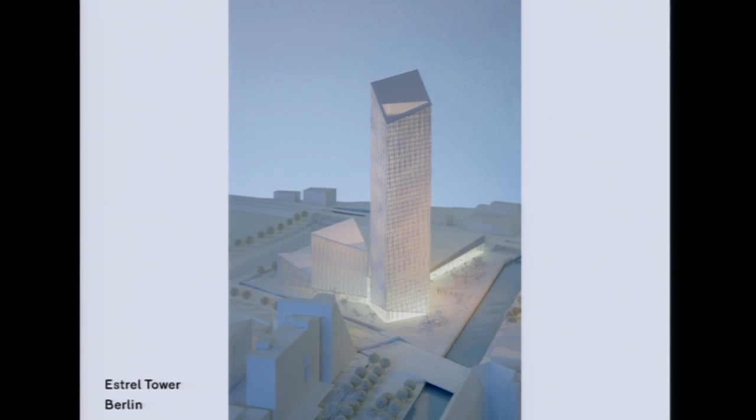With the Estrel Tower, a competition we won last year, which will be the highest tower in Berlin, it's a kind of threshold site between Neukölln, the periphery out here, and off to the left will be the new airport, and on the right is Neukölln, the 19th century city. So in a way, the building will become a gateway between the existing Hotel Estrel here, from the 80s, and create a new ensemble of buildings from hotel, offices, parking, and a Congress center on the right.

At this time, we were doing Alexanderplatz that Frank Gehry ended up winning. With all the problems of working in an inner city site, we had a certain amount of freedom to work out here in terms of just adjacencies to existing buildings. So in a way, the building does work like a kind of gateway here.

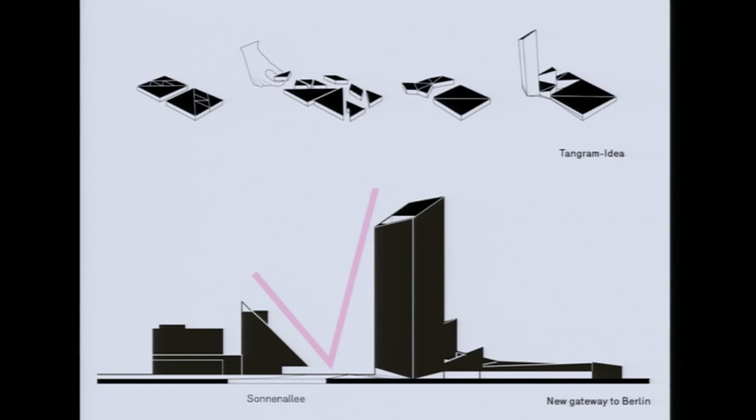We thought about the project as Tangram, which is a children's game of triangulated pieces that you can assemble as a puzzle and extrude to different heights to produce the project, which is this. So this is the building connecting across to the neighborhood, which does produce this gate as a series of triangles, which then encloses this atrium space, which is the core, the entrance of the space, and then you can add at a later date this flat Congress hall.

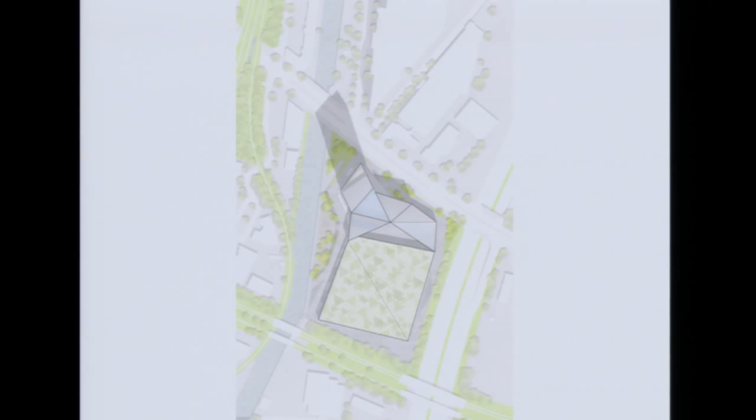So really the idea of the project—Berlin was funny because it has no real tradition of high-rise buildings like, say, Chicago or New York. High-rises tend to be solitary buildings. There is no sort of core like Manhattan, where you have high-rises populating a whole area. It works as a kind of one-off.

At the same time, we didn't simply want to drop a high-rise, 180 meters, in the middle of this neighborhood, but really wanted it to work as an ensemble of different scaled buildings to help mediate this tower to its context, and to have a very simple circulation connection through the project. So it does become a kind of assemblage of different elements that do that.

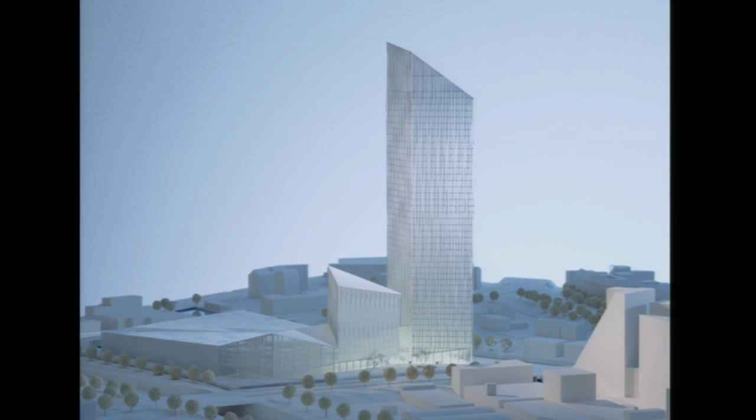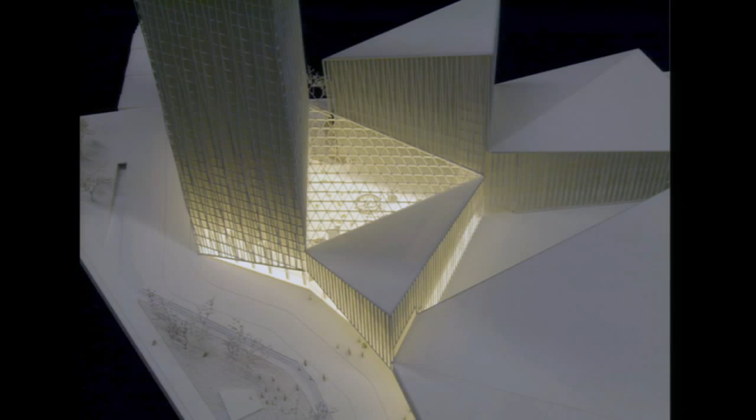So this is the project which we're just starting right now with the high-rise, a kind of roof terrace that faces the city, and then the other buildings which are articulated that help break the scale down of the building, which again center around a large central atrium which organizes the whole structure. We've just started, but we'll also have different ideas of facade making, a kind of family of different facades that will make each one of these elements unique, but that add up to this greater whole of components and to the ground, where this opens out to the water, to the canal back over here.

I think that was the last slide, but the idea tonight was really to show what kinds of work areas, and I still like this question, this 'what's next' question, so we're always on the lookout for that. I hope the setup of these different projects would show how we anticipate or think about what could be next in how we work. That gives us, I think, as a practice, an enormous amount of freedom, and it's also what makes the practice really exciting for us, both for us running the practice as well as people working there and students who come and work with us.